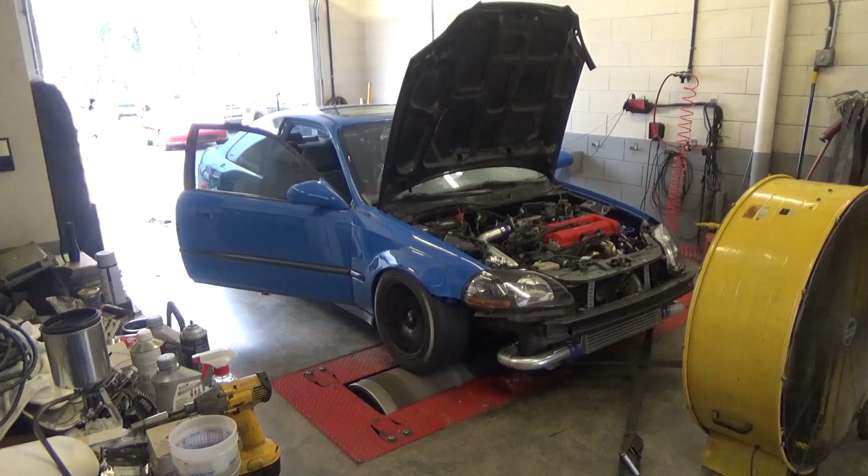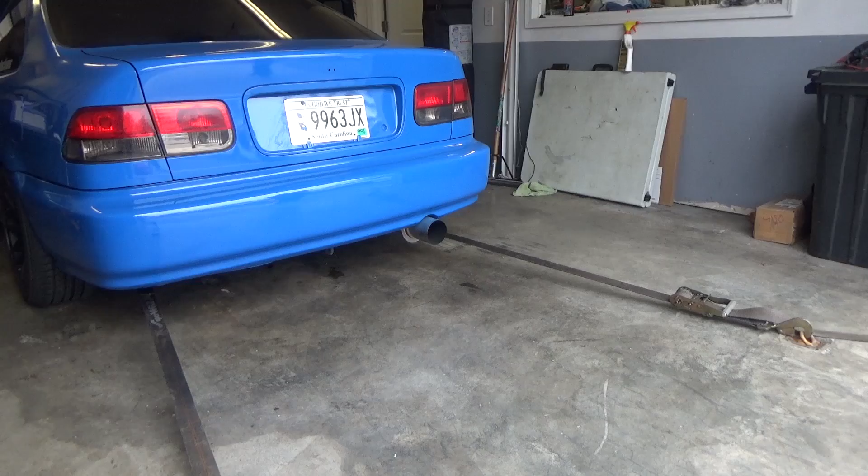Justin from 79 Productions, and today we are going to be wrapping up the turbo install of this. Well, we already wrapped up the turbo install, but we're gonna go get the car dynoed. So yeah, we're gonna be getting stuff done before that.

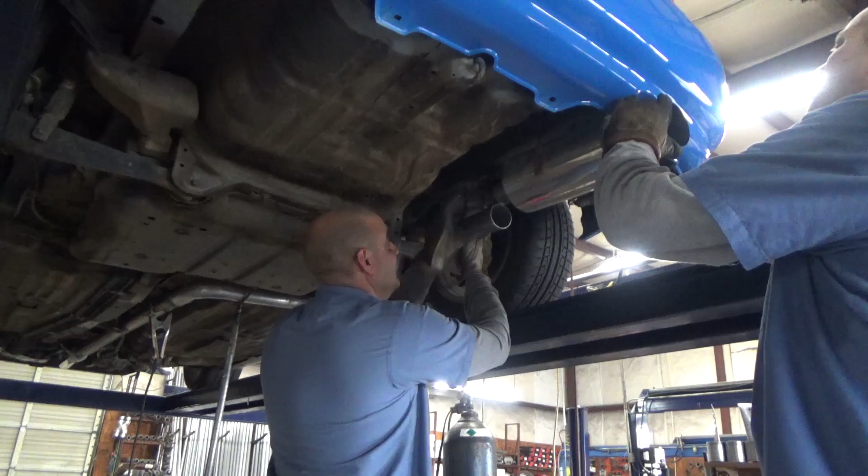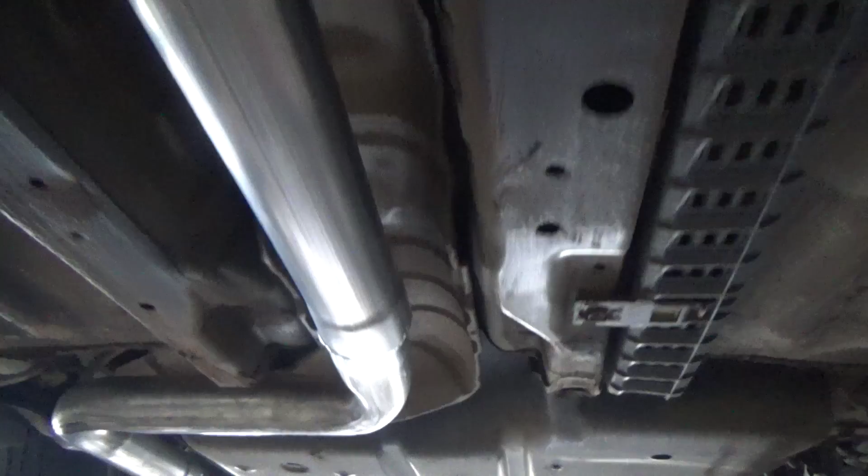Alright guys, so here's the exhaust. It's all fully done, 2.5 inches all the way back, and it just looks a lot better. And the other one was pretty small, so this is going to free up a lot of extra power.

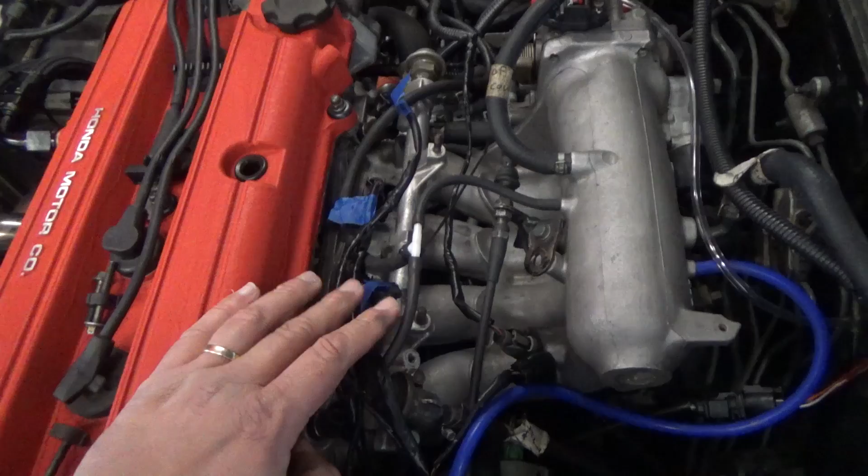Alright guys, so we need to take the injectors off. We're gonna remove the rail, and we're gonna put these on. Now what these are, they're Deka Chevy injectors, GM injectors, and I picked these up from Hunter Tuned, and I believe he says they flow 800 cc's.

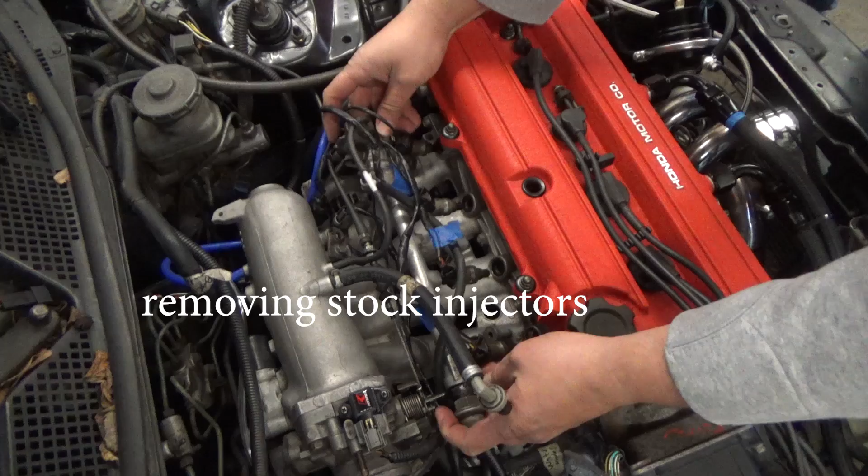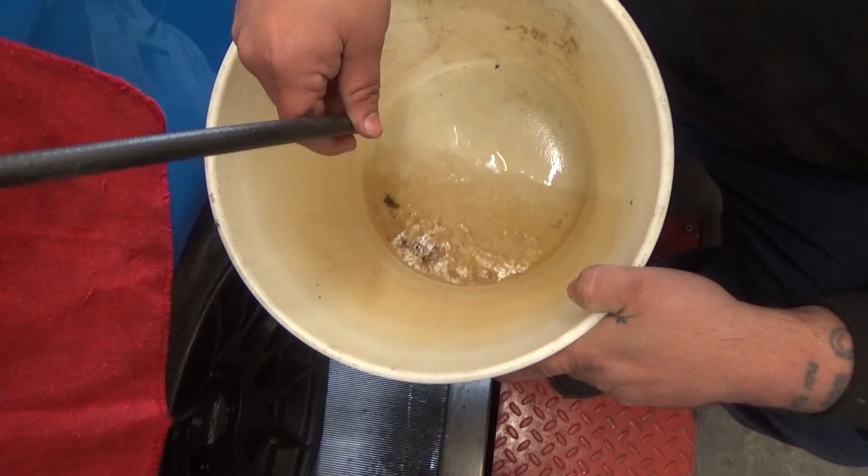It looks good under here, doesn't it? Just a very small amount. All right, guys, we got the Hunter Tune injectors sitting in the fuel rail, and just gonna install them in there, and then that's gonna be it, and we're gonna be good to go. When it starts burping a little bit, we'll just cut it off and we'll be good to go.

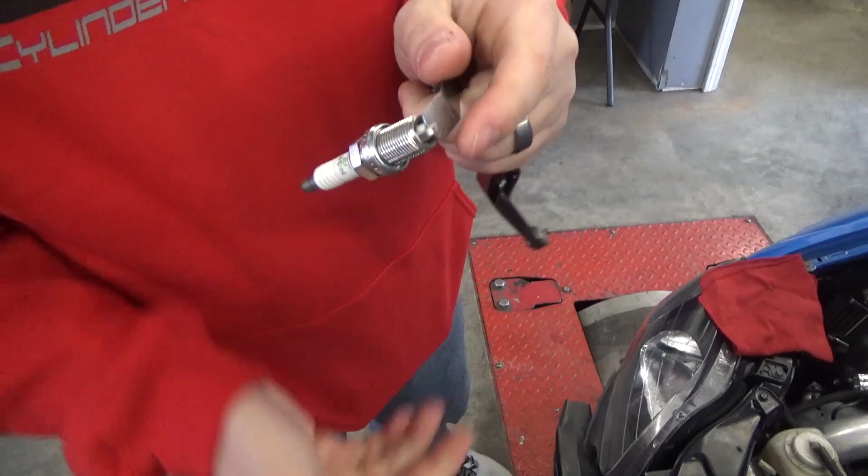Alright, it's up. E85 in it. Yeah. Valve cover might be leaking a little bit. Not bad though. All right, guys. So right now we're just gapping the new spark plugs, and we're running the NGK spark plugs and gapping them to, what are we gapping them? 20 thousandths. Yeah. The engine does feel good.

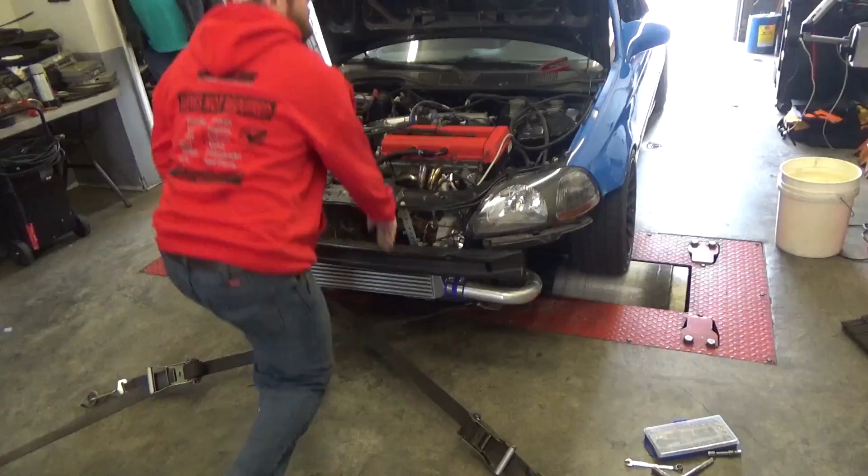Feels close. All right, guys, so here's what we're going to be doing with the ECU, and I'm going to let Will from Raw Performance explain to you what he's going to be doing. Well, we're going to be using a Demon board for real-time programming. I can't do that with just a chip-based. All you can do with these is just burn the final tune on the chip. Now, is this the Demon board? This is the Demon board right here. You can see it, Demon 2. This is the newer version that they have.

They had an older one. They redid some things, and this is what they got now. This is just for real-time fuel programming. You can do ignition changes on the fly. Anything you need to do, you just send it to this. It'll do it immediately, and then from there, I save the tune when I'm finished, and I'll put it on chip, and you're good to go. Now, is that Neptune? This is Neptune. You can also do Crome and I think ECTune, but I don't deal with those.

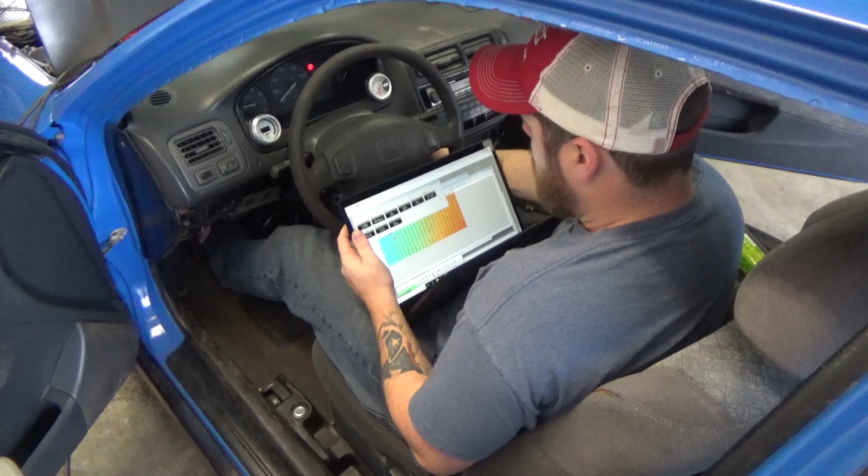So I started until I got where, you know, so I said, hey, I got a problem here. I need to put it a little rich. It's a wideband right there. And that's how I said, hey, it's not perfect. So 9.6 means it's running really rich?

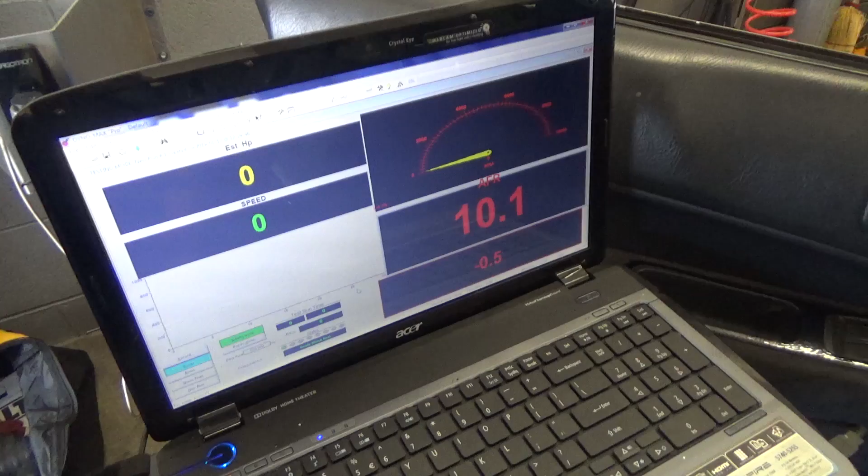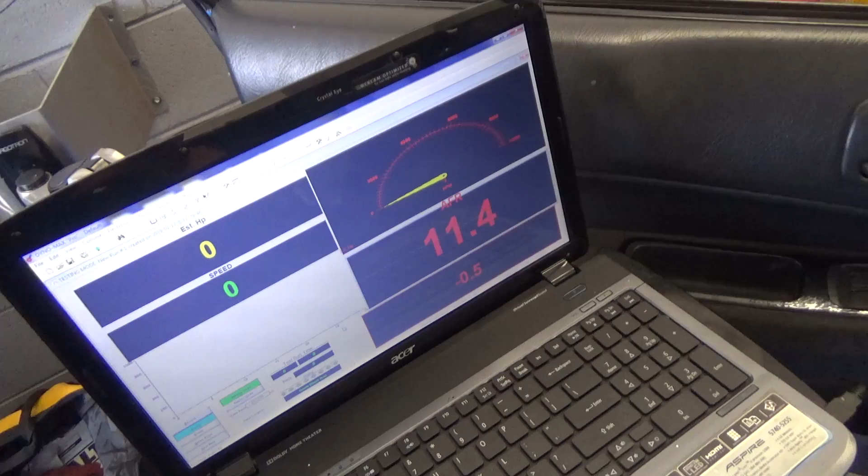So what do you do to make it not run rich? Well, to start with, with E85 you'll have to add some overall trim because it runs more fuel than pump gas. So to start with, I can just make big sweeping adjustments with this. Like, it's at 40% overall. If I change it to 30, it leans up. See it? Oh, okay. That's just an easy way to start at the beginning.

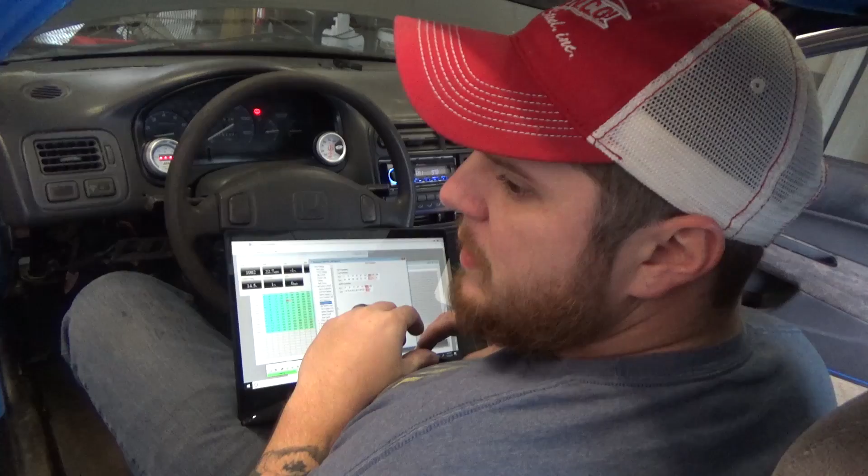When it's at operating temp, what AFR do you want it to be at? In the 14s is fine. 13 would be acceptable, but I can do better than that. Yeah, I see. There's a white one, and then you got your red one up here ahead of it. That white one is a TDC marker.

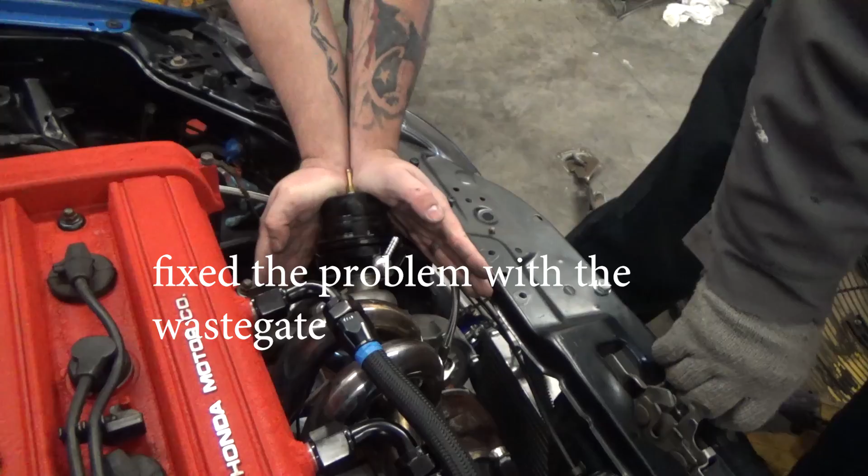All right, put my V-band around it. Down here on the floor. Take your time, I got it. Just wrap it around and then bring it back up to the top where you can work on it, so I can keep holding it. Yeah, there you go.

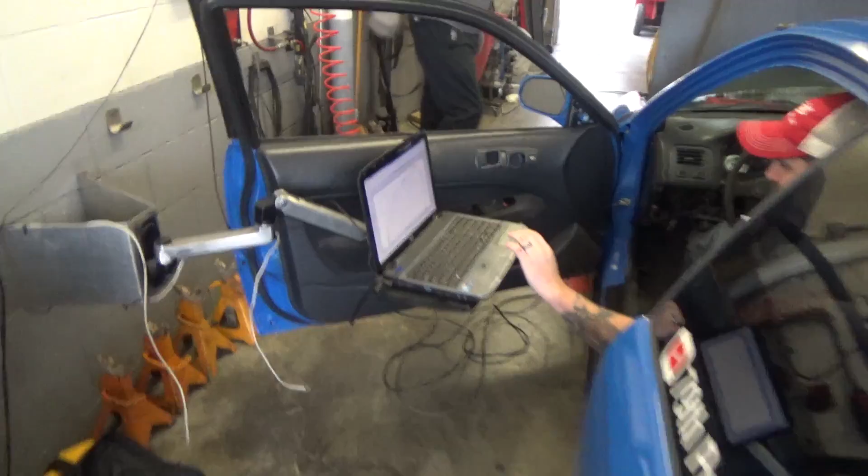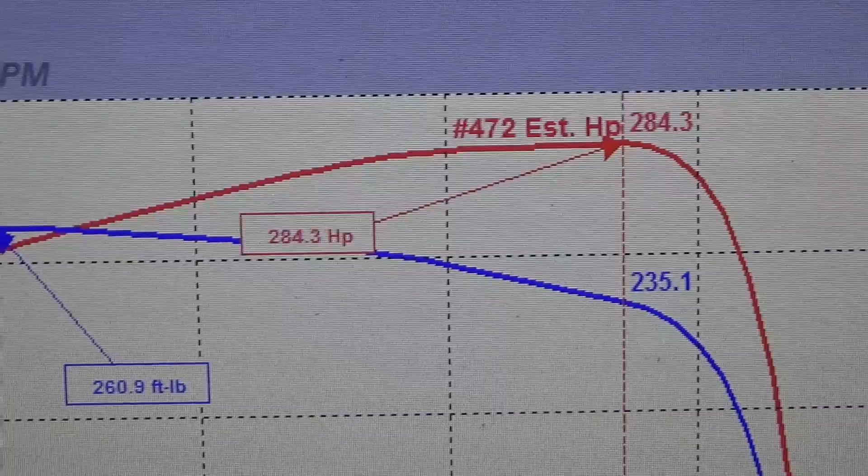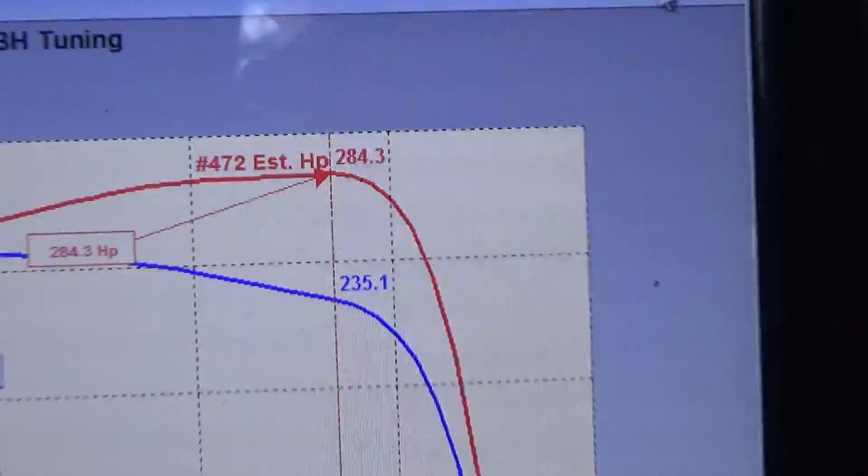That time. Can we turn it? Huh? Yeah. 10 pounds that time. 284. Yeah, give the boost controller 2 clicks. How many pounds were we at? 10 pounds right there. 10 and a half. Okay, so guys, let me zoom in for you. 284 at 10 and a half pounds and 260. So yeah, 284 horsepower and 260 foot-pounds of torque at 10 pounds.

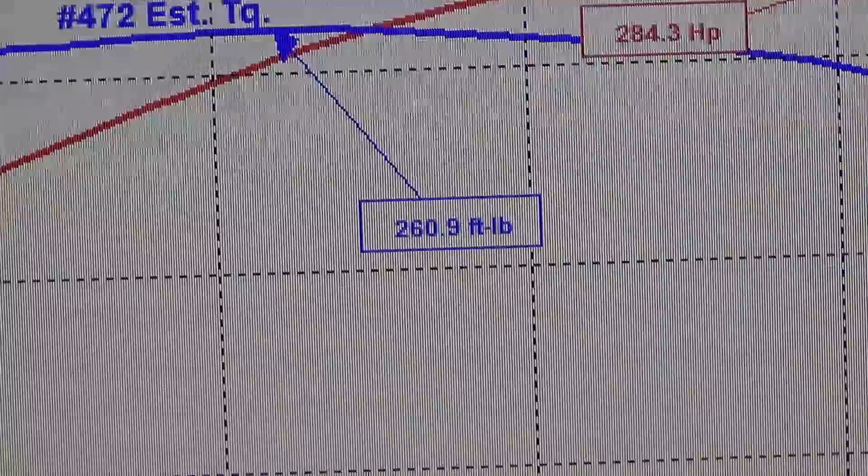Right now, we just hit 284 horsepower and 260 foot-pounds of torque, and that was on 10 pounds. I just turned the boost controller up 2 clicks. We're gonna go to about 12, and we're gonna try to hit 300. We're just gonna go all out with it. So we'll see what we get.

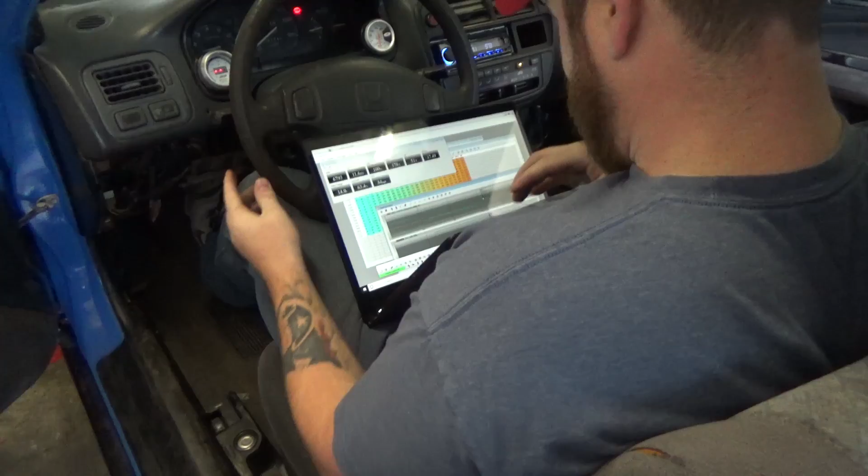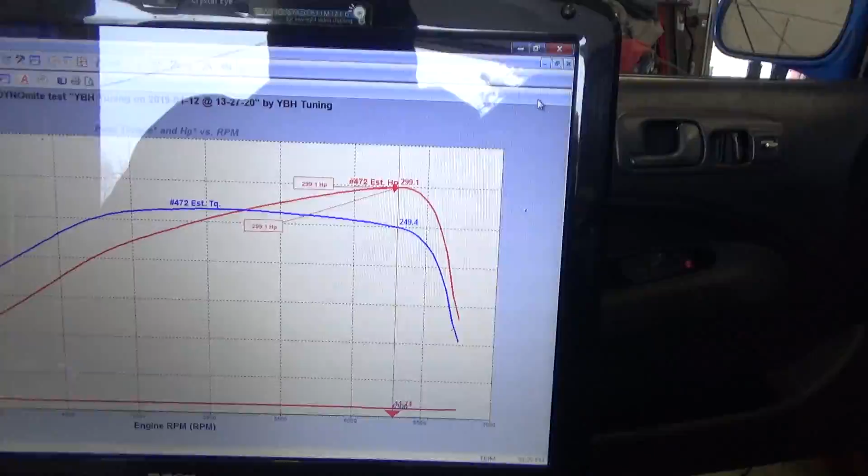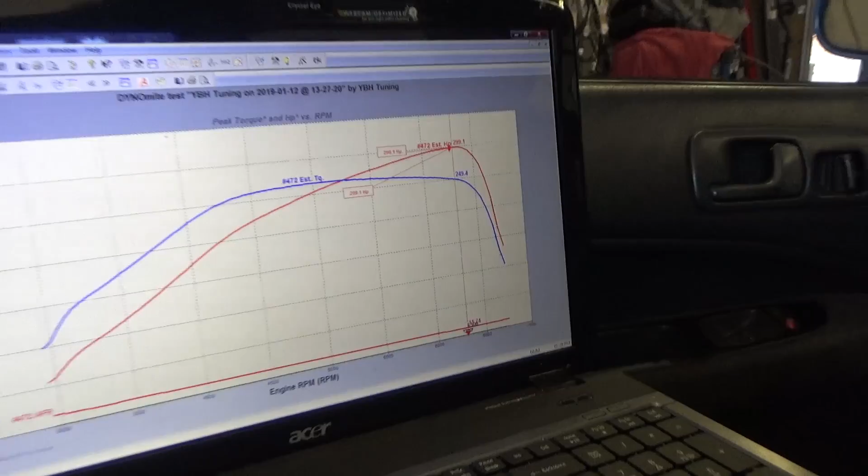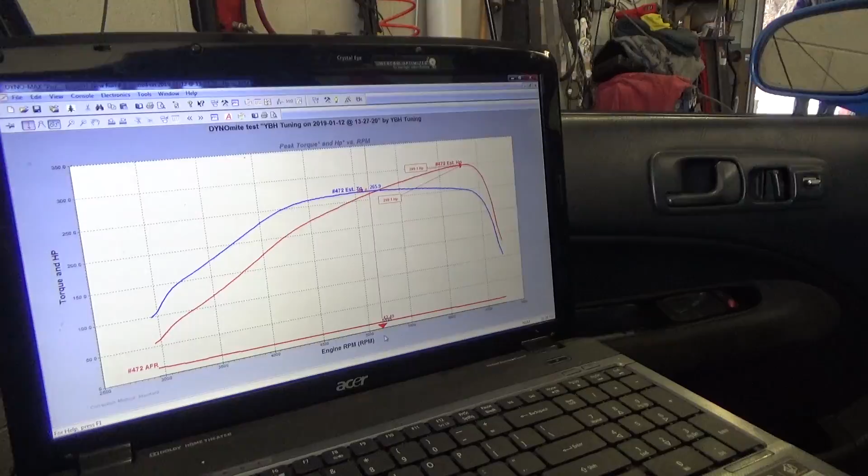How are we looking on that one? Went up to about 11 and a half. Let's see how we did. Where we at? Hey, Jesse. Yes, sir. All right, guys, so here's where we're at. We're at 299 horsepower and... Hold on, let me line that up for you. You gonna line it? Okay. Yeah, it's like 280 something, looks like. No! It's hard to do left-handed. Looks like 266 foot-pounds of torque. 65. Okay. Yeah, so here we go. 299 horsepower and 265.9 foot-pounds of torque.

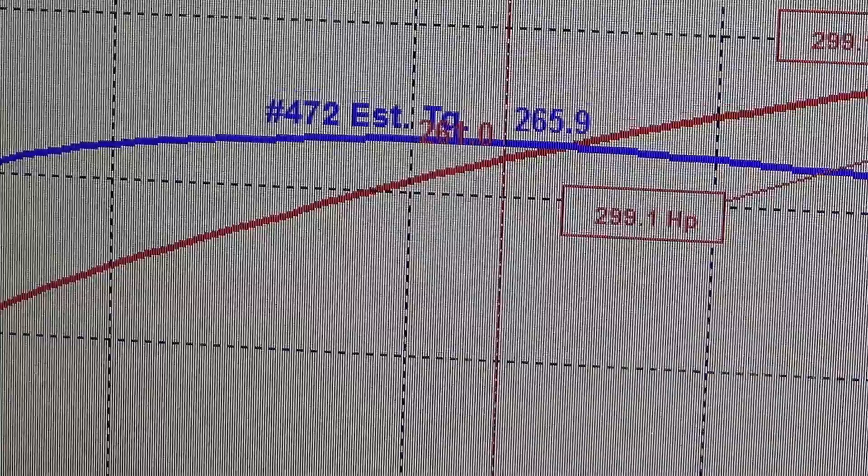What you say? We gonna go for more? I say we send it. You, man, it's your stuff. What are you thinking? It can do it. Give it one more click. One more click? Yeah. All right, guys. So right now we are at 299 horsepower and 260 foot-pounds of torque, and we're at 11 and a half pounds of boost, and we're gonna give this thing one more click and see if it'll crack 300. To the left, right?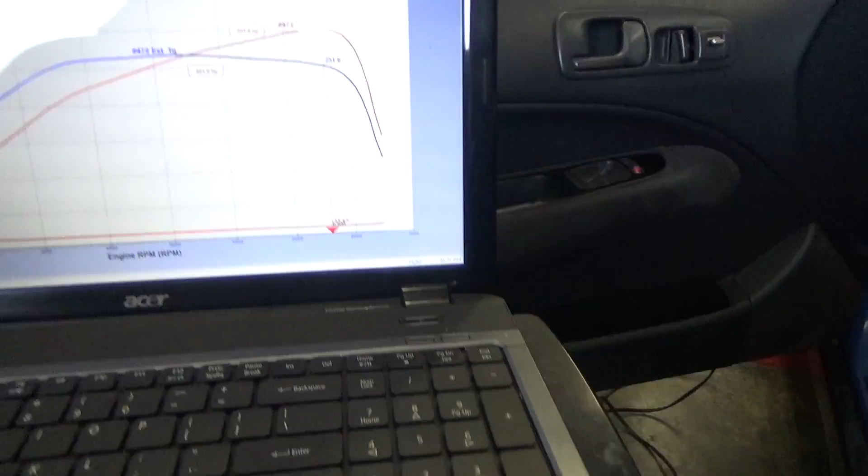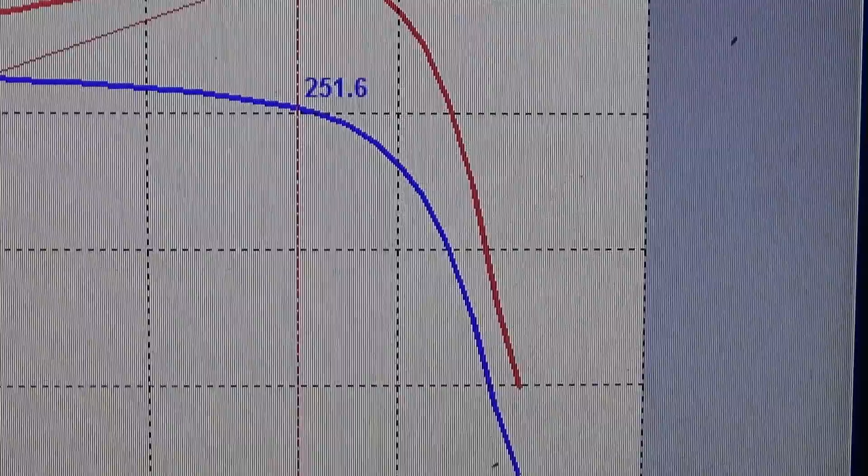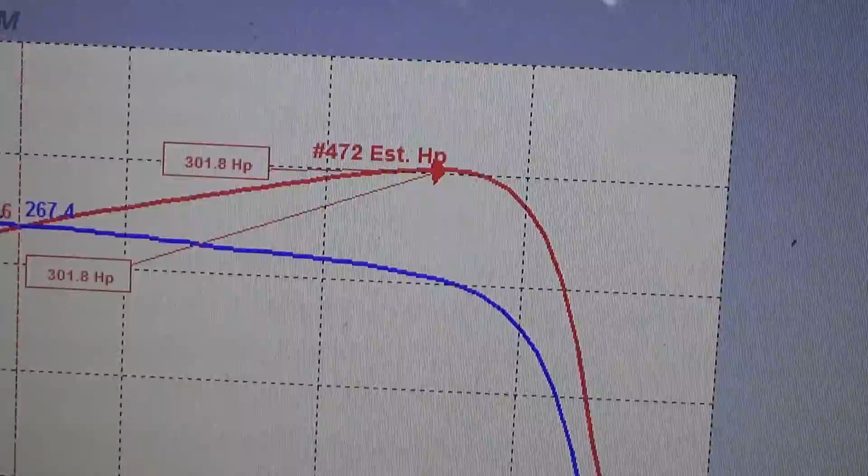Here we go. All right, guys, so we just hit 301 horsepower, and what torque is that? 251? No, it's more than that. Move it over again. Oh, you gotta move it over? Yeah, it only lines up with the horsepower. 267. Okay, so here it goes. 301.8 horsepower and 267.4 foot-pounds of torque. That's still 11 pounds of boost. And that's still 11 pounds? It didn't go up anymore.

You want to click one more or leave it alone? It's not going to do anymore. Okay. I put a degree of timing in it. Okay. That helped it. So yeah, guys, we just cracked 300 horsepower on a stock B20 engine, a $400 JDM engine, and a $500 eBay turbo kit, not completely stock.

So we did have a problem with the wastegate, and Will the tuner took it apart. What was it, the boot inside of it? The diaphragm was pinched. Yeah, the diaphragm was pinched, so it was running wide open boost, and he took it apart and fixed that. So yeah, we're good to go now. 301 horsepower, super excited.